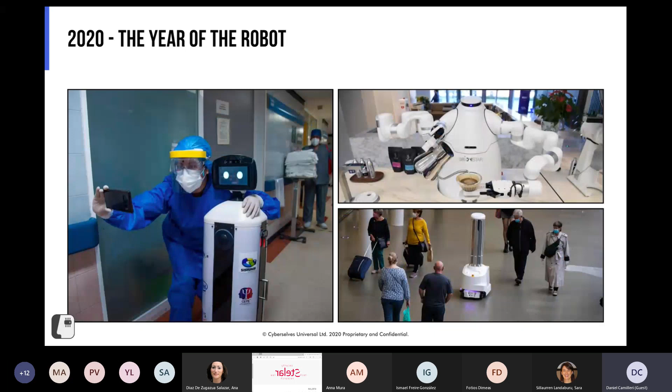Robots for disinfecting, robots for visiting patients in the hospital. We saw an increase in the use of robots within more social scenarios outside of the industrial workplace, to help with things like distancing, and to perform tasks that would otherwise increase the rate of infection.

But as you all know, this is the pain of robotics: every system you touch has its own ecosystem of software, most of the time its own bespoke software. For example, on the screen we've got 4 different ones, only one of which uses ROS. But even when you've got multiple robots using ROS, the problem still lies in that different ROS robots are still not plug and play.

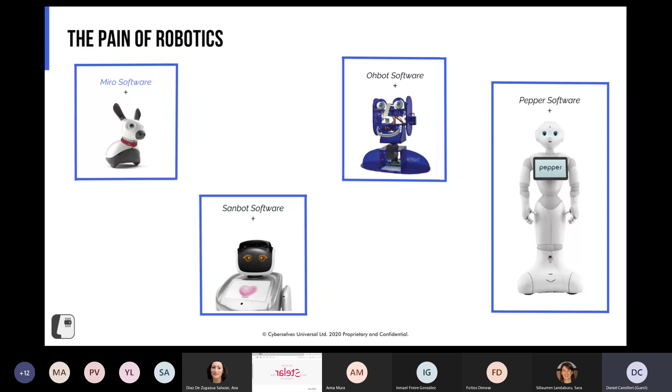I can't simply remove one robot from one manufacturer and put in another robot from another manufacturer and use it without any changes to the client software, to the applications actually running on that robot. This has led us to identify 3 problems within robotics.

These problems are holding robotics back from achieving the same mainstream adoption as a laptop, a computer, or a smartphone. Robots, I believe, are the next generation, the 3rd generation of personal devices. But before we can get there, we need to solve these 3 problems.

First, the one closer to me: different robots are programmed differently. Every time you switch a robot, from my experience, I spend a couple months learning about that robot, learning about its inputs and outputs, before I can start translating algorithms I created for other robots so they can work on this robot.

That is, in my opinion, the first issue: different robots programmed in very different ways. The second issue is more of a commercial issue, in that without means for programming different robots in the same way, you end up with a severe lack of applications available for commercially available robots.

So you're able to buy a Pepper robot, but if you're a business and you want to use that Pepper as a concierge, or for different functions, it's not possible to go online, find an app you can just download and run on the robot to serve that purpose.

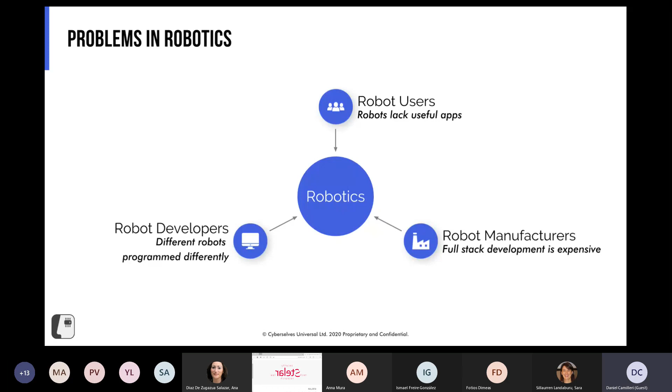So we see these three problems. They feed into each other, they're very tightly knit. We believe that at CyberSelves, our mission is to realize the true potential of robotics by solving these three problems.

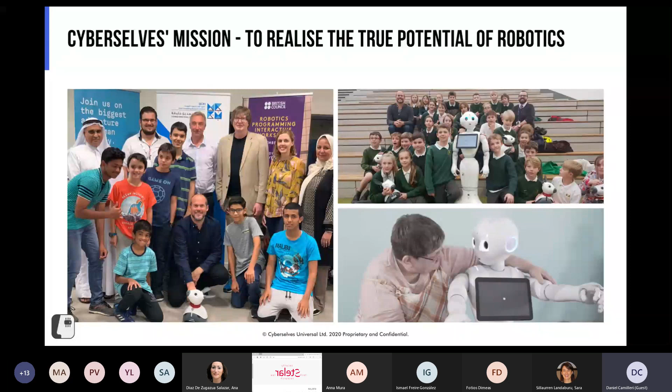At the core of the three problems is a standardization of how we think about robots and how we think about these different systems of hardware, actuators and sensors, and how we abstract away the differences of different robots so that we can program them in a coherent, unique, and more standardized way.

And so we've created Animus, which is our software. Animus, which is a robot agnostic software library.

What that does is standardize the way we program robots. By doing so, we reduce manufacturing costs for robot manufacturers because they can now focus on the lower level hardware and the software to interface with that specific hardware. But then through standardization, the rest of it is completely the same. So robot developers can create applications which run on robots that haven't even been created yet, and robot manufacturers can deliver their solutions to market even quicker. Combining all this leads to robot users becoming more frequent because they've actually got the functionality they need.

Animus abstracts away the differences for each robot, and we'll talk about it in a couple slides as to how we actually approach this. That is where thinking about robots in more human terms comes into practice.

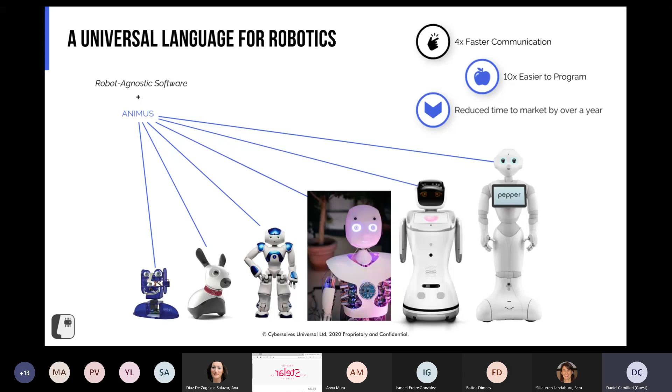Continuing on the path of what makes it unique, in comparison to other robot programming languages and robot SDKs, our Animus software SDK is supported by multiple programming languages and even any operating system. It was always an issue for me programming robots in that I always have to work in Linux, and then it's usually either C++ or Python to create the applications I'm doing. So I think that needs to change.

With Animus, you can actually program, connect to, and control robots remotely from any operating system, whether it's a desktop operating system or a mobile operating system, and with your programming language of choice.

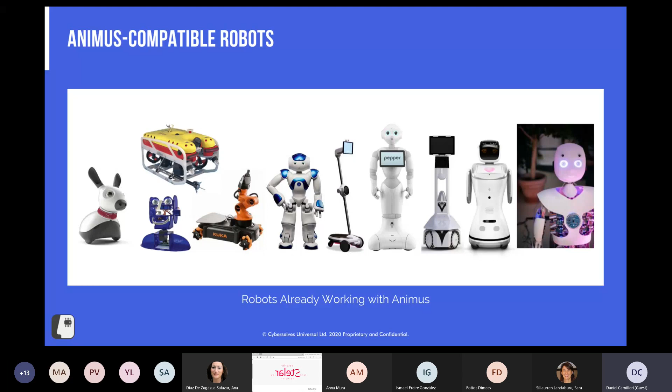Here's a list of the advantages we offer to robot manufacturers: instantly internet-enable your robots so that you can remotely connect to and control robots with really low latency. Simplifying development because developers can easily create Animus apps and control robots from any operating system. Also, it's lightweight and portable. Well, 30 megabytes is a bit outdated, but 100 megabytes today gives you everything you need as a local installation without compiling anything else, everything you need to control your specific robot completely remotely and with really low latency.

So how do we make Animus robot agnostic? This is the key question. Our guiding principle is that Animus needs to act as a nervous system, a universal layer between the body and the brains, the actual applications controlling the robot.

The solution for us is grouping robot inputs and outputs into what we refer to as sensory modalities. Those are the different senses that, from a human perspective, include vision, audition, touch, and a certain means for moving, usually in a task-oriented fashion rather than us calculating which joint to move at which angle. So what we do to standardize control of different robots is group perceptions, stimuli, and actions into named categories, which are also directional. For example, from the perspective of the brain, from the perspective of the application, vision is an input. You sample vision, you process it, and then you output motor control, a motor command.

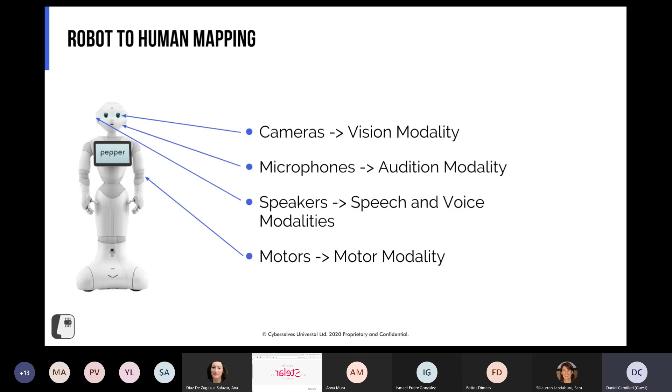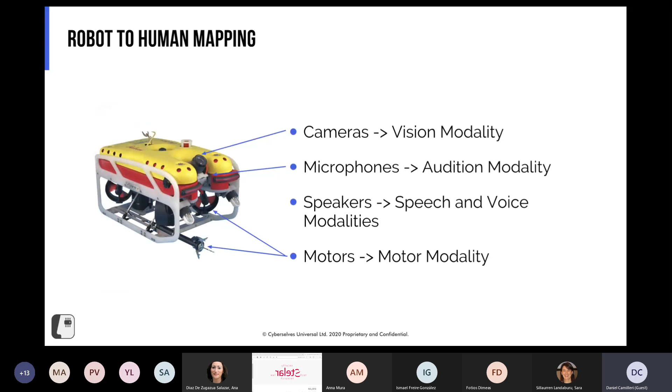But from the client end, all the programmer needs to think about is, I want to sample the vision modality. So, robot.getVision. That's it. That gives me all of the visual information I need, whether it's a humanoid robot, ground-based, underwater, air, or space. We perform this robot-to-human mapping for all the robots in our stable, and this is how we abstract away the differences between robots and make it plug and play on the client side.

So here's the anatomy of an Animus application. Using the client SDK, this is the pattern a developer would follow. They'd log into their account, which gives them access to all the robots available to them anywhere in the world, remotely. Then they can connect to one or more of the robots available, and then open the modalities for the set of required modalities.

So if I want vision and motor, I can simply open those. If I want more modalities, audition or voice, I can also open those. But it is very bandwidth efficient, and you can only open the set of inputs and outputs that you need from the robot. And then finally, you start your sensing, decide, act loop.

You get the modality by passing in the modality name, which receives all the data in a standardized format, irrespective of the robot. You can then process that data, make a decision, and set an output, again in a standardized form, and send that to the robot, which then interprets it and carries out that action.

Finally, when you're ready, you disconnect from one or all your robots and close the whole application. So that is the goal here: making the programming of robots as simple and as human-centric as possible. You can think about breaking down a robot application by thinking about yourself, and how you, as a robot, would carry out these actions. What decisions would I take? Which sensors am I sampling?

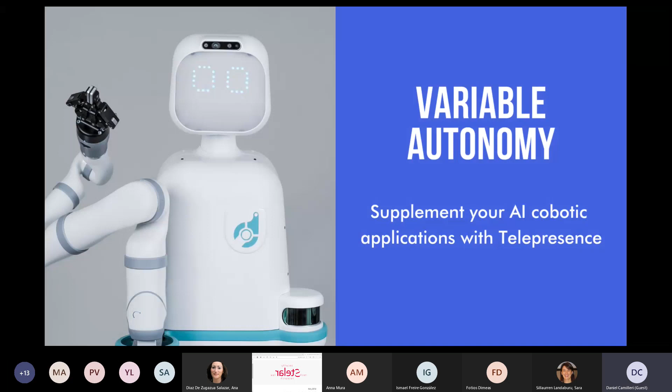And that leads us now into the main application, the very first application we've created with Animus. This application for us is a means of demonstrating what's possible, and that is Telepresence, which fits very well into robotic applications in terms of supplementing the autonomous applications running on the robot whenever those applications encounter situations they don't know how to handle. That's when you can introduce a human in the loop to actually take over.

I'll show you guys a video of a Telepresence application we demonstrated to the BBC a couple of months ago. Can you hear the audio?

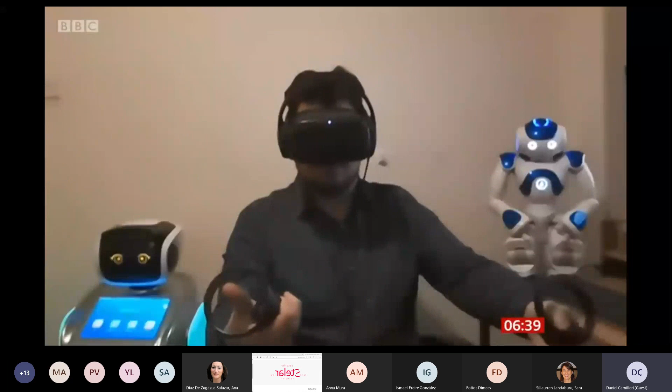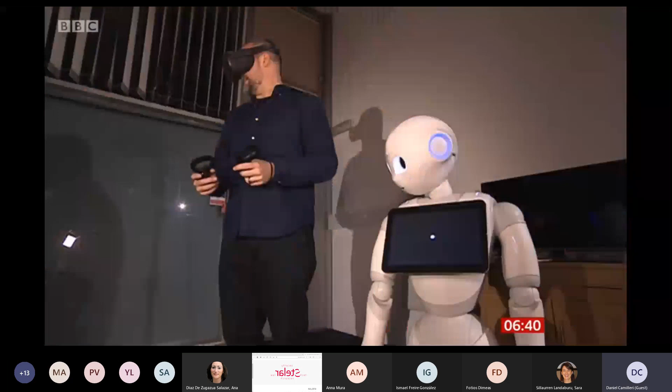Robocop, how about RoboDoc, science fiction? Yes, we can, could soon become a reality. A team at the University of Sheffield have received government funding to develop ways of using new technology in hospitals and care homes, as Lakshmi Gopal has been finding out. This is Benny the robot. He's in a home lab in Sheffield, but he's being controlled in real time from Manchester. Through the technology, anyone, anywhere can immerse themselves in the robot. I become the robot simply by putting on a VR headset, and now I can see everything the robot sees, and I can control its arms. Robotics firm CyberSelves has developed a versatile, more user-friendly programming system, so what robots can't yet do alone can be done with the help of human controls. They hope it'll revolutionise health tech. There's an increasing use of robots in healthcare right now, but the artificial intelligence that powers those robots isn't quite up to scratch, and the programming is very, very hard. It requires incredibly specialist degrees to program robots. So what we're trying to do is simultaneously make it easier to control robots and also make up that gap for the artificial intelligence. So a robot moving around a hospital, let's say cleaning a ward, will get stuck or won't know how to do a certain task. A human being can enter into it, perform the task, and the robot can then learn in the future from that as well. The same system can be used to control any number of robots to perform a whole range of different tasks, from surgery to bomb disposal, or, for example, in care homes, as a way of having COVID-safe company.

No social distancing needed here. It's the closest to being with someone without actually being there, and opens a world of possibilities. How are you today? I've got your medicine right here.

The doctor could be hundreds of miles away. Could be some specialist that you would like to see a patient, and they might be in New York, and they just need to put on a VR headset and they could be in Sheffield looking at this patient. Can you look to the left for me, please? And to the right? You're saying, well, can you show me your leg? And you can look at the leg, and you can do that just as if you were in the room. It's the naturalness and the spontaneity of it which is going to make a difference.

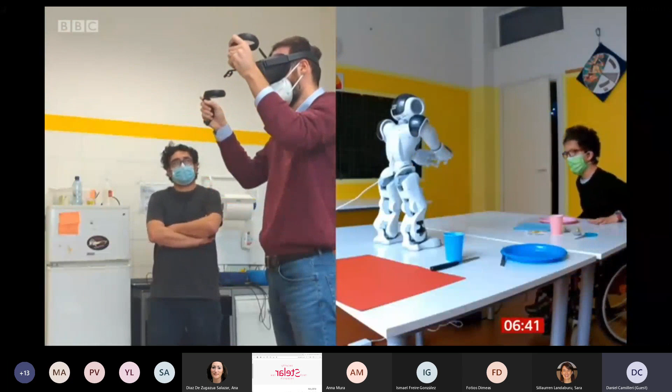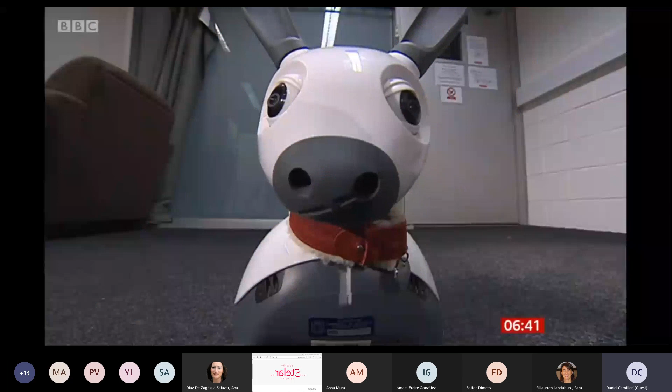It's a glimpse of the future, that. Wow. So that is how we're using Telepresence at the moment, and we offer, based on Animus, because of

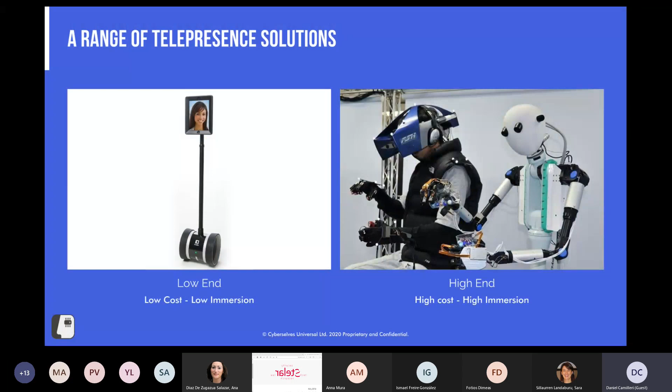its modularity, we can offer any range, any variety of telepresence solutions, from low immersion, where it's just audiovisual, to more high immersion, where you've got other modalities such as haptics, force feedback. This is what we're working on as part of the ANA Avatar X Prize competition, of which we are semi-finalists. This is really just for us a test of how far we can push Animus in being as robot agnostic as possible, and providing a range of solutions to the problems in robotics today.

But beyond that as well, with the use of a standardized representation for all the information coming from robots and being sent to robots, it also offers an exciting possibility to create what I like to refer to as exponential AI, an AI application where you've got multiple robots carrying out different tasks on day one. You're collecting the information from those robots. The tasks could potentially be carried out by humans, and the robot is collecting the sensory information while those tasks are being carried out. But in the end of the day, you're training your AI applications.

And because of the standardized nature of Animus, the next day, all these 5 robots can now perform, at least in a recorded way, if not more intelligently, the same 5 tasks that were recorded on 5 different robots. That, to me, is an exciting avenue that I believe should be explored to really take us forward to the next generation of robotics.

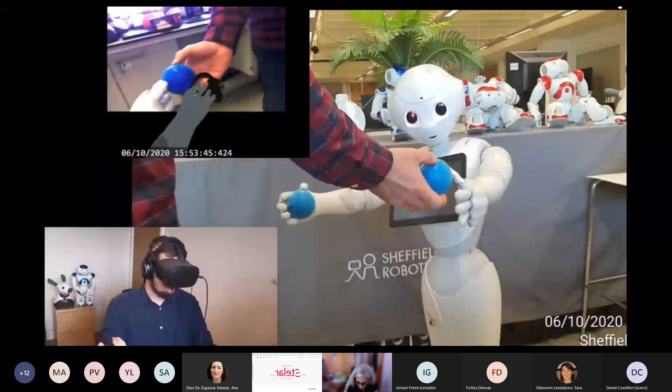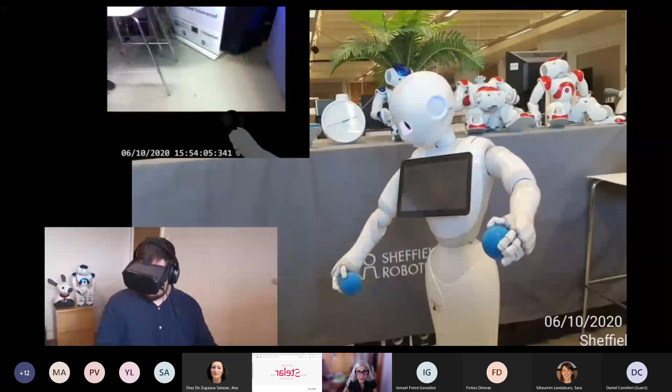Good, but this is an interesting challenge that you're posing, an interesting solution. Although I see there are some indeed challenges, some implications for embodiment and ownership and the sense of the self, right? Yes, very much so, for both the robot and the human. So there will be some interesting implications about your solutions.

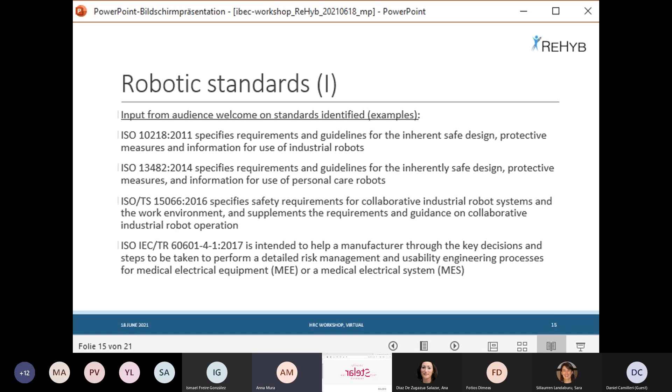Yeah, that would be the first thing that comes to my mind when you raise this point. I'm not sure if we need to continue with the presentation, we could have this kind of loose discussion as a next step, because here you go into more detail on the ReHyb project, right? That, or it would also be interesting to see the application of the AI ethics guidance. I see you have some relevant information here.

So one of the two innovations here is not only trying to contribute to technical standards in the domain of robotics or healthcare ICT, but also to pilot the so-called Trustworthy AI ethics guidelines, developed by the European Commission's high-level expert group on AI. This is innovative from a social scientist perspective because it provides a standardized way of assessing these ethical challenges, where usually you're dealing with legal or ethical partners in a project and they all do their own thing in terms of how they present and evaluate the different topics. This way, we have a standardized way to cover the different ethical dimensions of a project.

So this is one activity in addition to what we do in technical standardization.

Nikos, sorry, you're not changing slide, right? We don't see your presentation. No, I have changed slides. No, we don't see your slide. Sorry, do you see now? Yes, can you put it in presentation mode? Yeah, I'll try, it's difficult. Do you see the change now? Now it changed, yes. We see another slide, but not in presentation mode. You can leave it like this, it's fine. But do you see the slide on the notion of impact assessment? Yeah, we do. Okay, and do you see now the slide you missed? The about slide or not? Yes, we see the notion of impact assessment. Okay, you see this one, but maybe we'll miss the next one. I don't know, did you change? You don't see any change then? No. Okay, I'll do presentation mode again for every slide then. Okay.

But is it fine if it's like this? Yeah, it's fine. Go ahead.

First, I'm going to explain the notion of impact assessment, which has 5 elements in total, each informing the other. First, we need a team of assessors to analyze the consequences and risks which stem from some societal concerns.

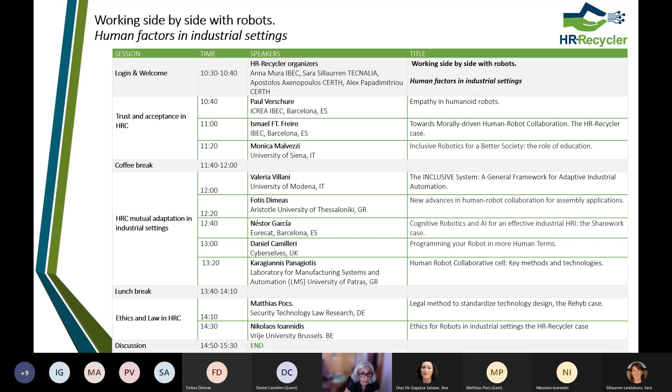So, thank you, Nikos and Matthias, for this introduction to the ethics issues. And with that, we conclude the presentation sessions, and in principle we should enter the discussion part of the workshop.

Although we don't have a lot of time because we're supposed to end at 15:30, the discussion points I've highlighted come back a little bit to the goal of the project. What I've listened to during the day is that a lot of projects, a lot of effort is put into giving robots more responsibility and giving humans only some sort of supervisory role, so that humans will have decreased physical and cognitive effort in the industry domain.

So I'd like someone to respond to this point, with this human-robot collaboration endeavor: are we really boosting industrial and economic growth? Maybe we can answer that. There are statistics that say yes, we're boosting - we're losing some types of jobs, but creating more jobs. It's not clear to me from this morning's presentations how right now we are impacting economic growth with the solutions we're working on in industry and robotics applications.

There's also a concern that autonomous robots will have a negative impact on our economic growth, and also pose a negative challenge for our culture. So maybe I'd like to tease Ismael with the first question, if Ismael you're still there.

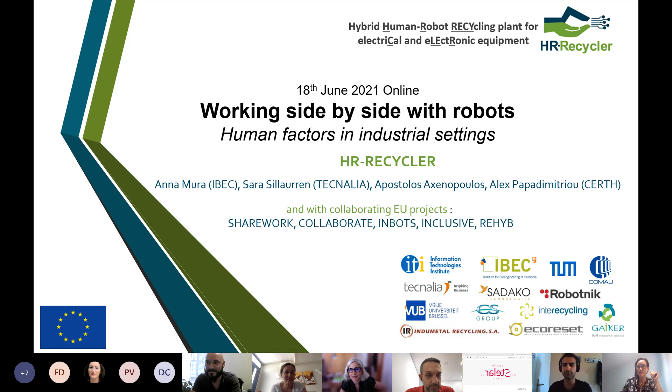Okay, so if we're ready, then we can have the picture. Anna, maybe you can stop sharing the slides. All the pictures are better. Okay, how do I leave? No, just stop presenting. Voila. Okay, but we don't have all the people at once, right? Doesn't matter, the ones we are. Okay, Anna, have you taken the official picture? I don't know, I see myself in the corner. Anita from Tecnalia? We are just 1, 2, 3, 4, 5 people. No, it doesn't matter, just take the picture. It looks more like an HR Recycler consortium picture.